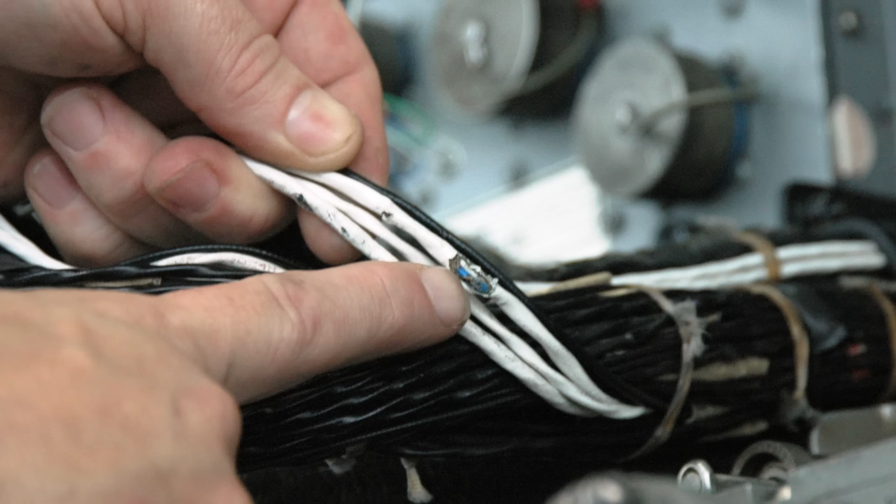A single steel bar locks the wheels down with a satisfying thunk. No computers, no circuits, just your arm and a piece of metal connecting you directly to the fate of the aircraft. Modern electric motors promise convenience, but every new wire and switch is one more hidden chance for failure when you least expect it. For pilots who have lived both worlds, the question is not nostalgia, it is survival.

The difference between trusting a bulb and feeling the gear engage could cost you more than just a repair bill. So why did aviation trade a human sense of certainty for automation's silent gamble? Let us break down what really keeps you safe in the air.

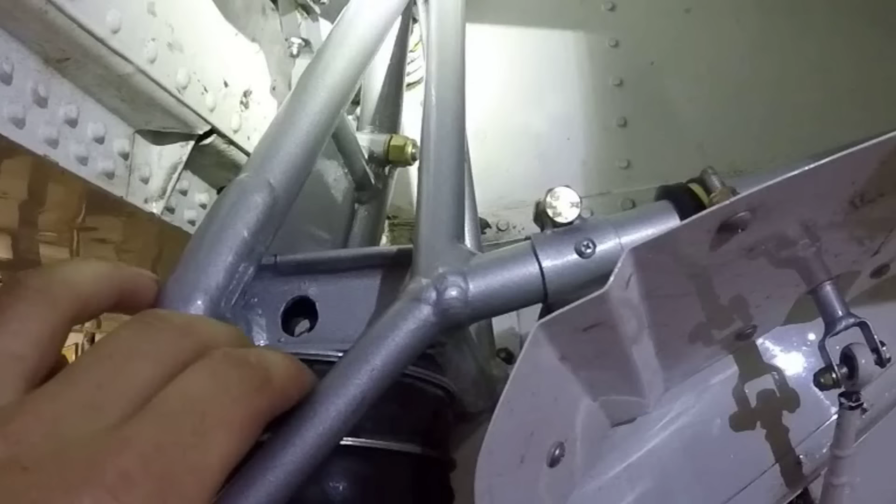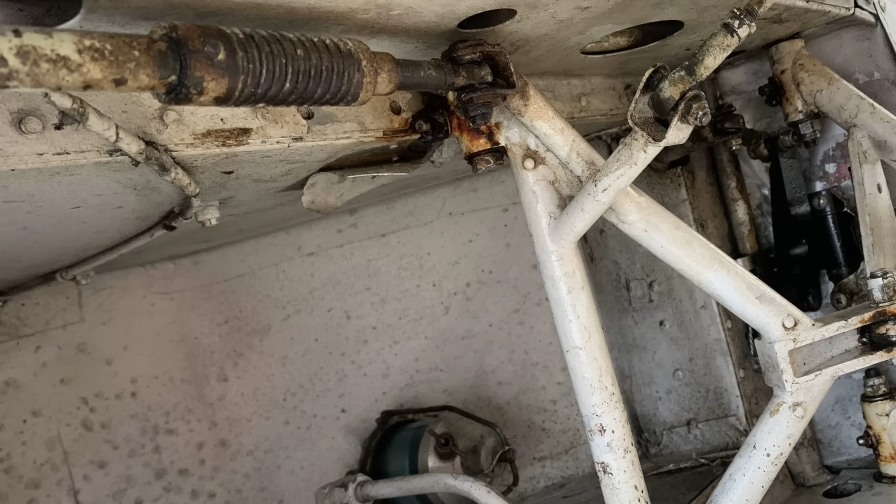Reach down between the seats of a classic Mooney and your hand closes around a steel lever, the Johnson bar. This is not just a handle, it is the first link in a chain that runs straight from your arm to the landing gear. The path is as direct as it gets, a solid bar anchored on a pivot under the floor, connected by push-pull tubes and bell cranks to the main gear legs. Every motion you make is transferred, unfiltered, all the way to the wheels. There is no motor humming in the belly, no relay waiting to click, just metal, moving metal.

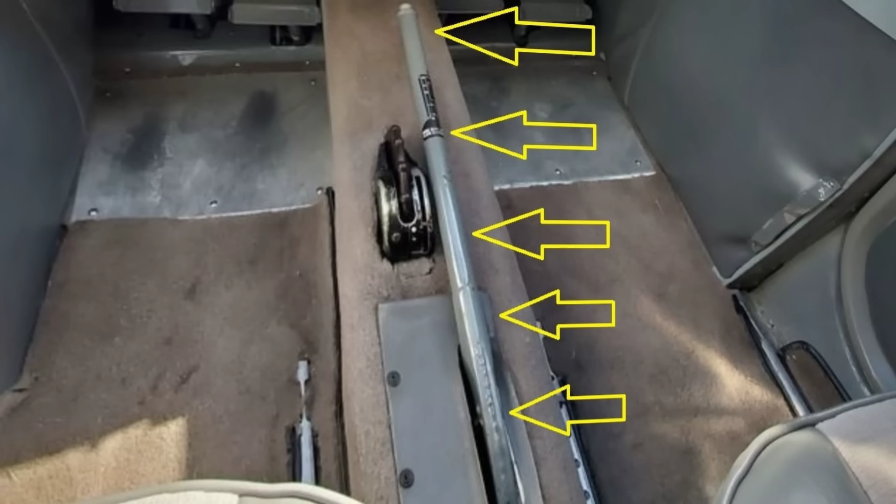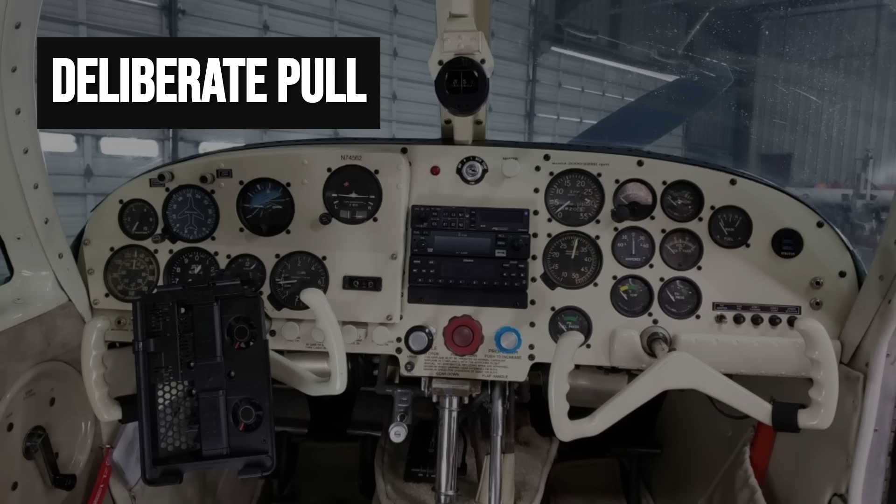The heart of the system is the over-center latch. When you throw the bar down for landing, you feel a rising resistance as the gear swings into place. Then, with a final snap, the bar locks over center and drops into a detent on the floor. That is not just a click, it is a mechanical promise. The geometry of the linkage means that once the bar is latched, the gear cannot fold back up without a deliberate pull. There is a downlock spring or bungee depending on the model, adding a final preload to keep everything tight.

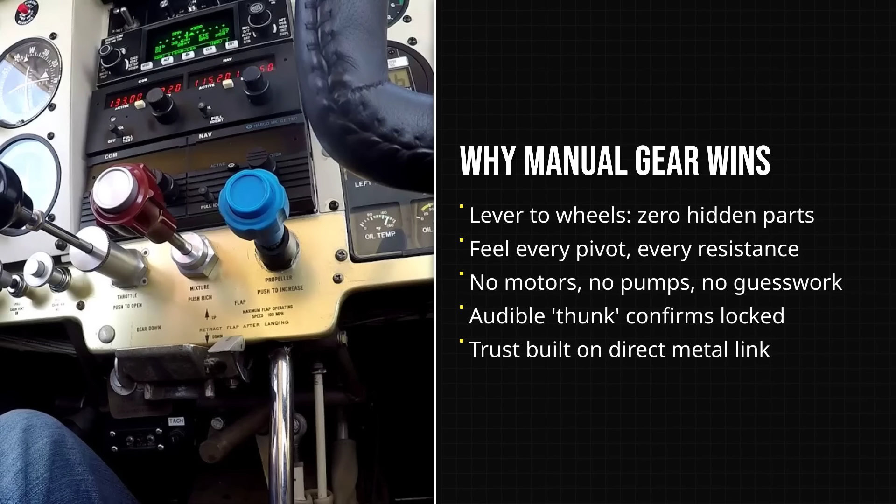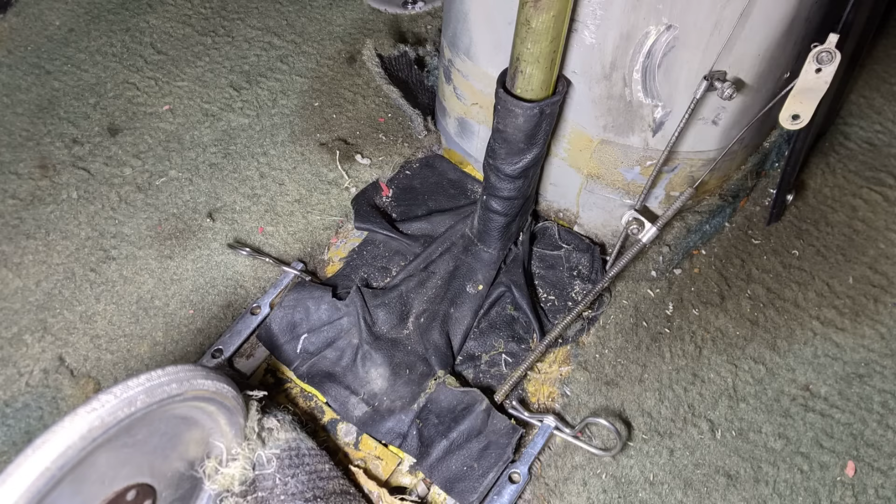From the cockpit, you can trace the entire system in your mind. Lever, pivot, tube, bell crank, trunnion. No hidden circuits, no buried actuators. If you ever wonder what is happening, you can look, reach, and touch each joint. The total part count is low, just enough to do the job, nothing extra to fail in silence. Every joint is visible, every movement is audible and tactile.

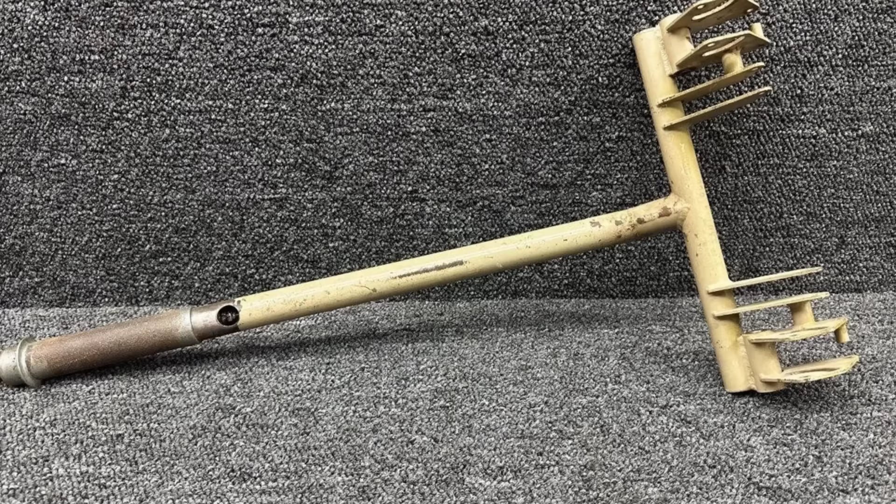When the bar is down and locked, you know it because you did it yourself. The floor vibrates with the thunk, the latch holds steady, and the gear is either down or it is not. No in between, no mystery. This is mechanical honesty. The Johnson bar does not ask for trust. It demands participation. The effort is not just a workout for your arm, it is a feedback loop.

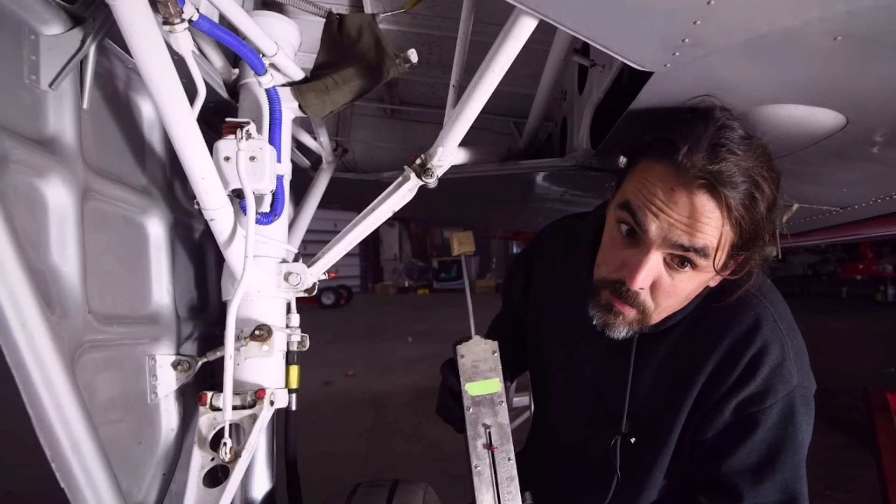If something is stiff, you feel it. If the bar will not go all the way, you know instantly that something is wrong. There is no guessing, no waiting for a green light. The entire linkage is a conversation between you and the airplane, and every flight, that conversation starts with a single, solid throw.

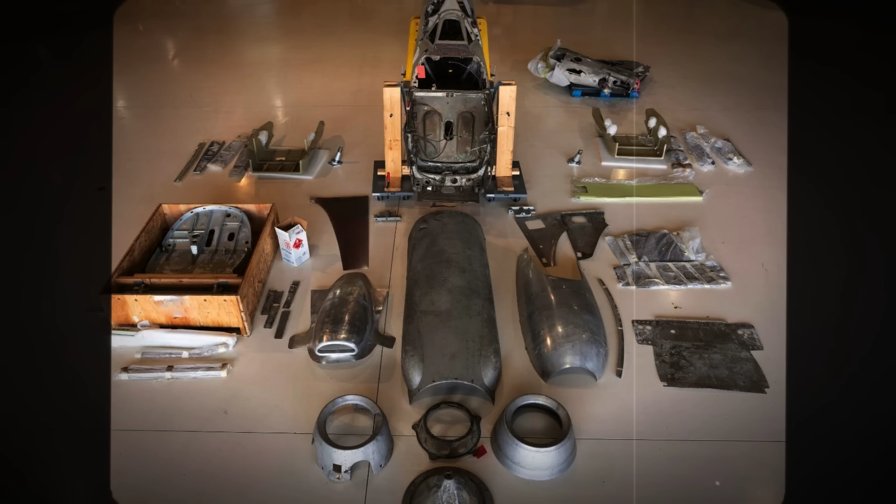Al Mooney didn't build airplanes for the faint of heart. He built them to go fast, run lean, and keep the pilot in command. In the 1950s, every ounce mattered. Hydraulic pumps and electric motors were heavy, complicated, and expensive to fix. So Mooney's answer was the Johnson bar, a direct mechanical link from cockpit to wheels that cut pounds and complexity out of the airplane.

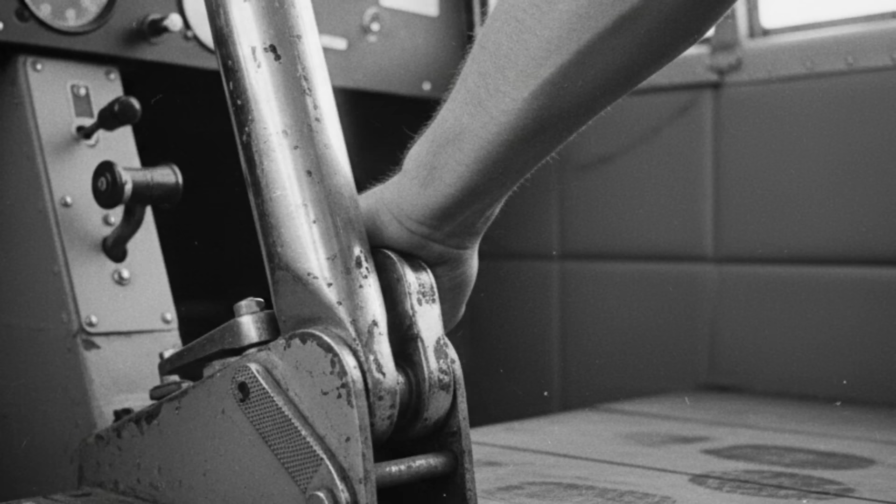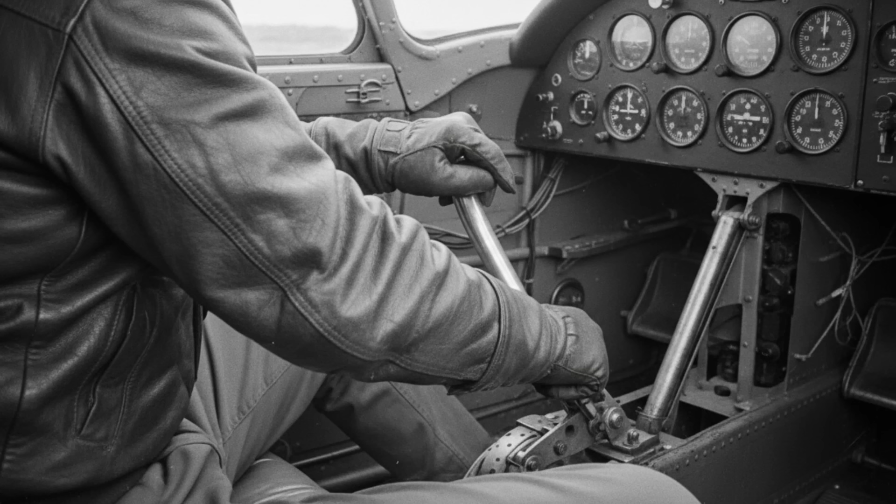The sales brochures of the day bragged about the weight savings. Less weight meant more speed, and more speed was the Mooney calling card. The manual gear wasn't just a throwback. It was a calculated decision to keep the airplane light and honest.

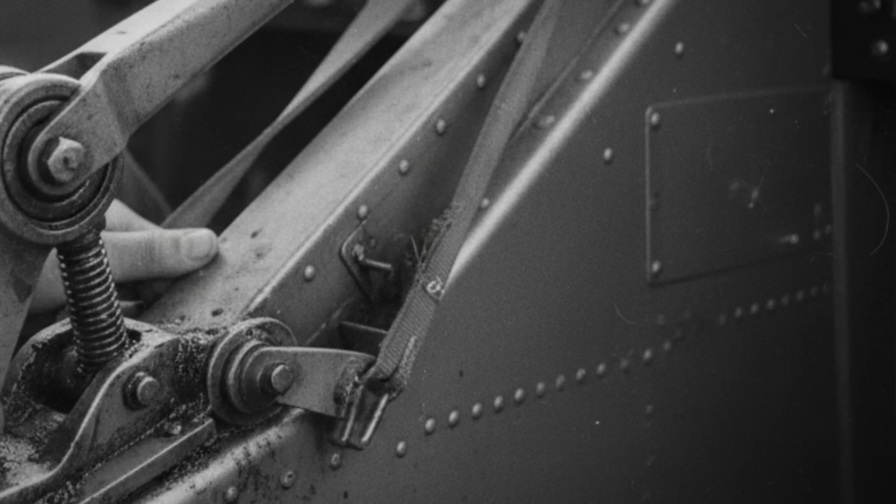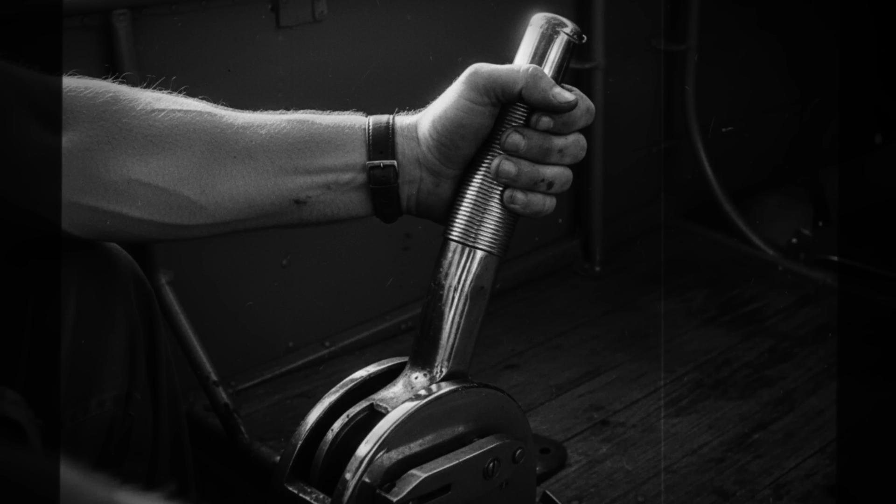Operating the Johnson bar is a learned skill. It is not just a matter of pulling a handle, it is a full body motion. You reach down, grip the steel, and drive it through a long arc. There is a moment where the load builds, and if you are above the gear extension speed, the aerodynamic forces fight you. That is the airplane's way of telling you to slow down. It is not a warning light or a buzzer, it is physics, right in your hand.

If you try to muscle the bar at 100 knots, you will feel the resistance and back off. Only when you are in the right envelope does the motion turn smooth and the bar snaps into its detent with a satisfying clunk. That is your confirmation, you did it right, and the gear agrees.

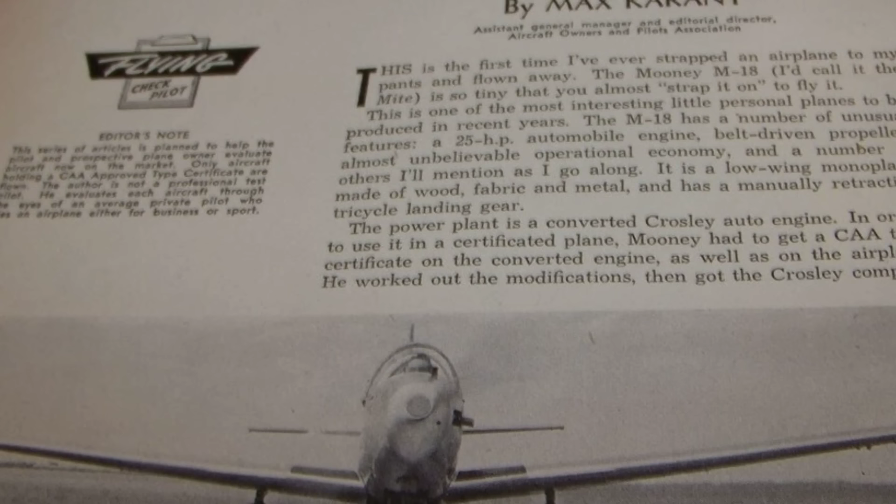Mooney's manuals and pilot training guides from the era spell it out. Proper technique is everything. The bar requires a quick, athletic throw, not a slow push. It is a move you practice until it becomes second nature. Some pilots call it a workout, others call it a ritual.

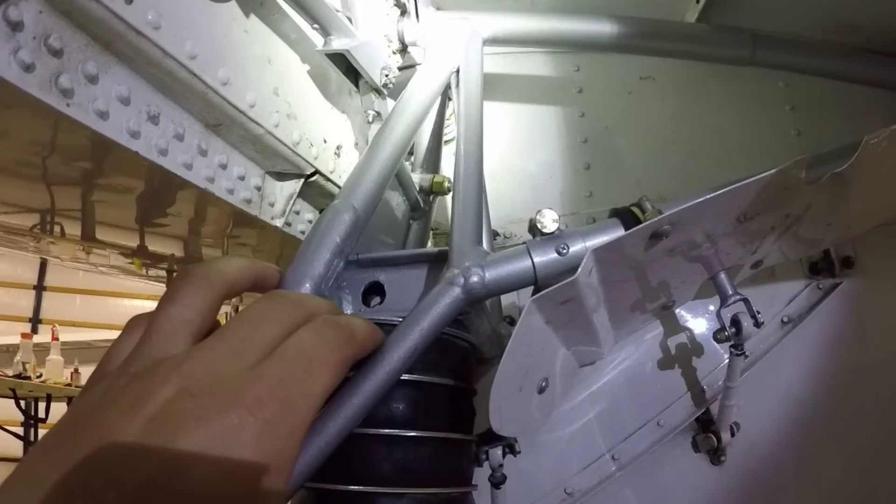Either way, it is a moment of connection. Your arm, the bar, the gear legs, all moving as one. There is no ambiguity. If something feels off, you know it instantly. If the bar won't go, you are either too fast, out of rig, or something is in the way. The feedback is immediate and unmistakable.

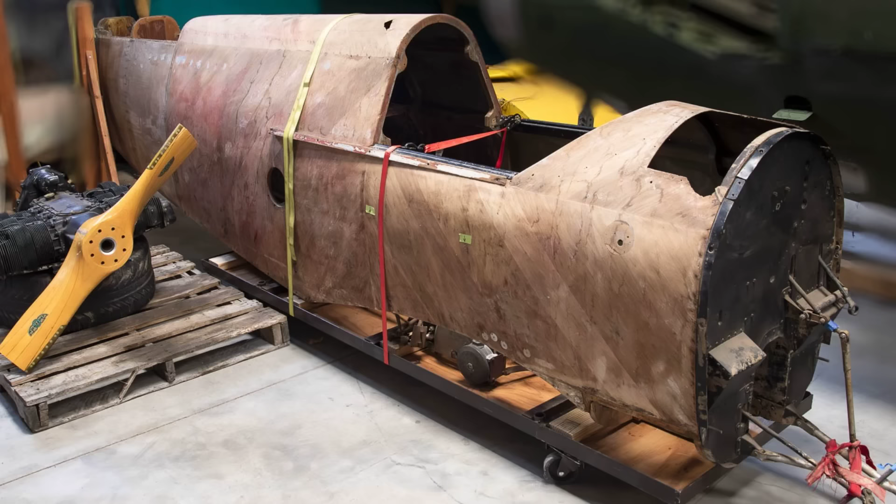This wasn't nostalgia or stubbornness. It was engineering for people who wanted to know exactly what their airplane was doing. The Johnson bar didn't just save weight, it put the pilot in the loop. Every movement, every ounce of force is a direct conversation with the machine. That is not something you get from a plastic toggle or a row of indicator lights. It is the kind of certainty that only comes from steel, sweat, and a design that trusts the pilot to do the job right.

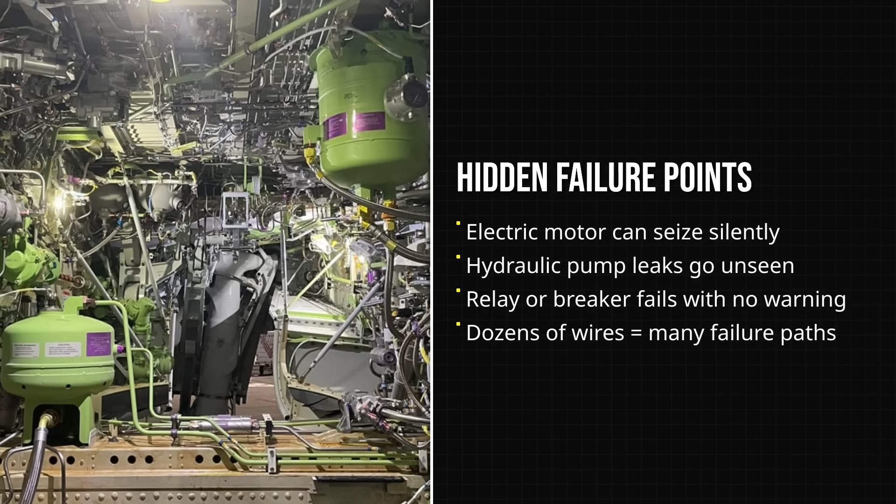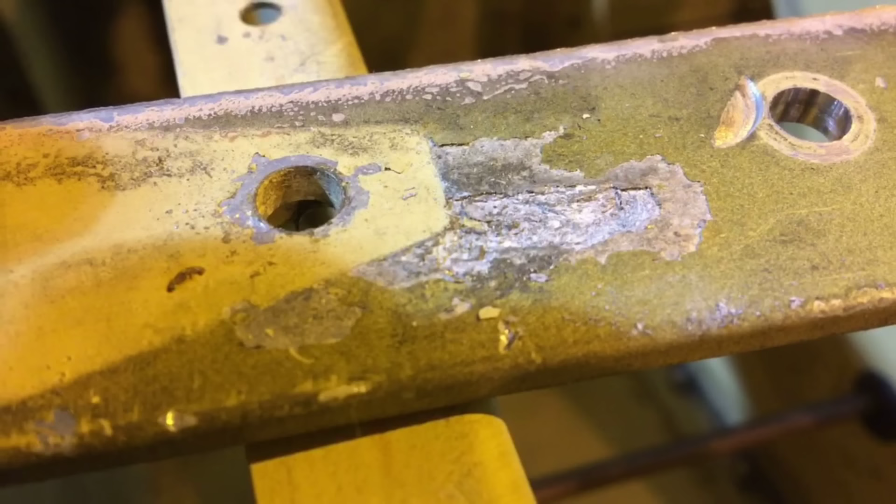Electric landing gear systems promise ease. You flip a switch, wait for the motor, and watch for a green light. But beneath that simple act lies a web of vulnerable parts, each one a potential point of failure. Inside the belly of a typical electric gear airplane, you will find an electric motor, a hydraulic power pack, a tangle of relays, circuit breakers, and a line of microswitches that decide when the gear stops moving. Each of those components has its own job and its own way of quitting, sometimes quietly, sometimes with a bang.

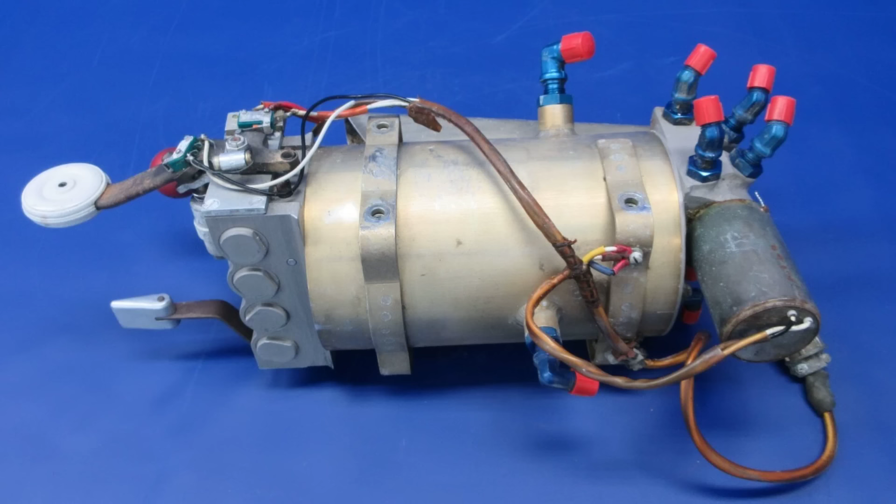Start with the power pack. In models like the Cessna 210 and Piper Arrow, the power pack is a compact bundle of electric motor, hydraulic pump, reservoir, and sometimes a pressure switch, all crammed into a single housing. If the motor seizes, nothing moves. If the pump leaks, you lose pressure and the gear hangs in limbo.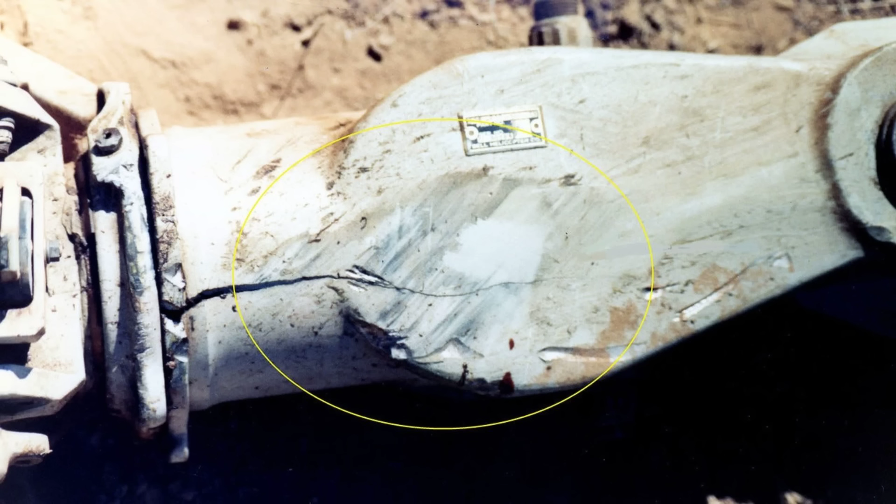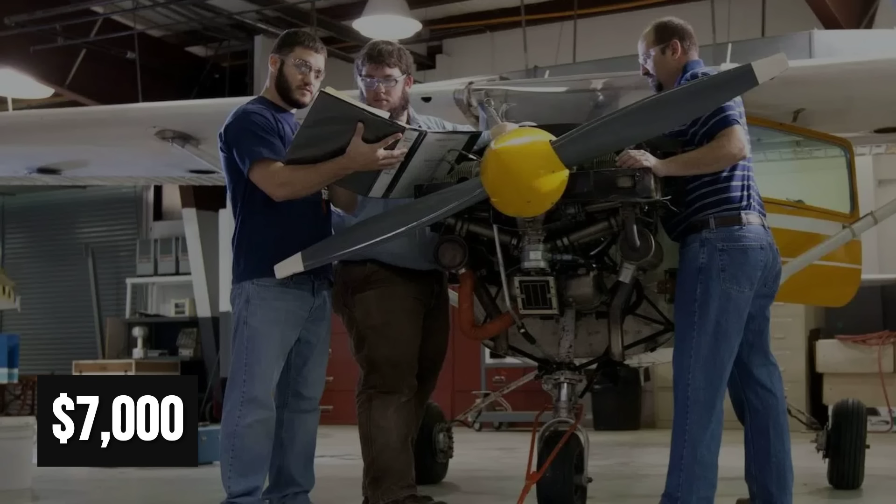FAA service difficulty reports and airworthiness directives keep showing up for these parts. Cracked reservoirs, worn brushes, leaking seals, and check valves that stick open are common. One failed O-ring and the fluid ends up in the bilge instead of the actuators. Shops routinely see overhaul invoices in the $3,000 to $7,000 range just for this one part.

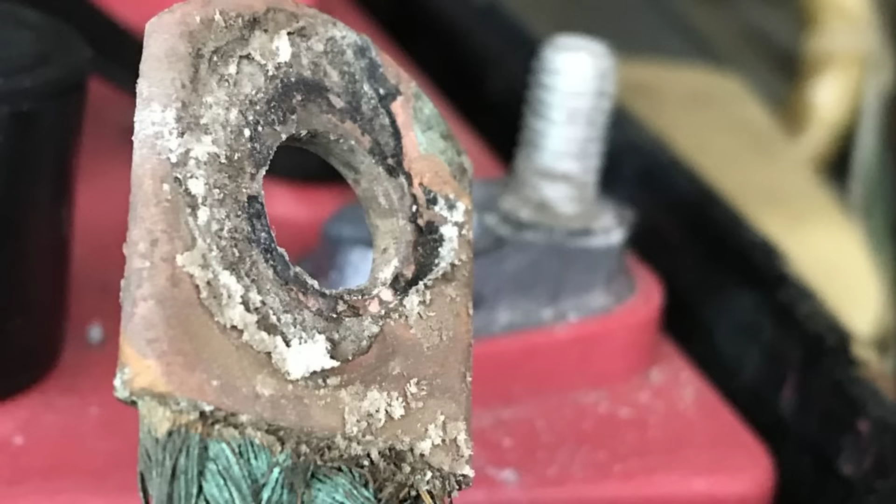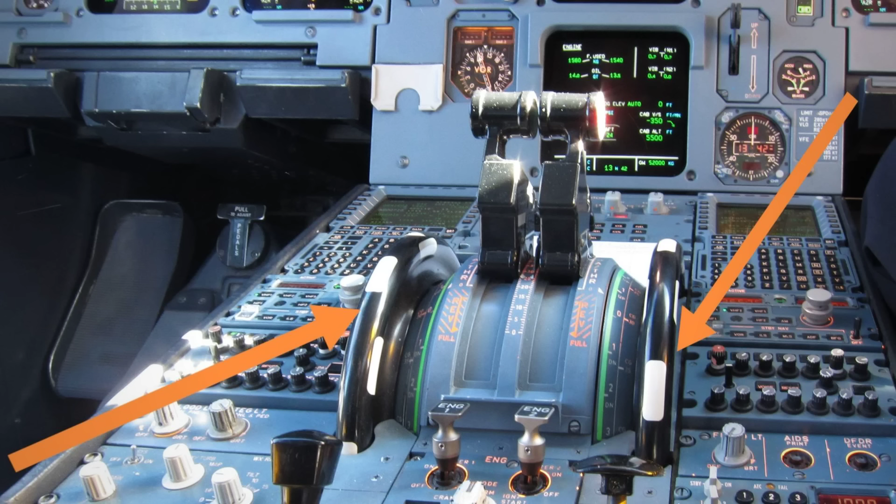The wiring is the next hidden risk. The wiring harness snakes through the fuselage, connecting to relays that route power and to breakers that protect against shorts. Any corroded connector, chafed wire, or loose ground can break the chain. Circuit breakers trip for reasons that are not always obvious, sometimes from a real fault, sometimes just from age and vibration. When that happens in flight, the pilot faces a silent panel and a gear handle that does nothing.

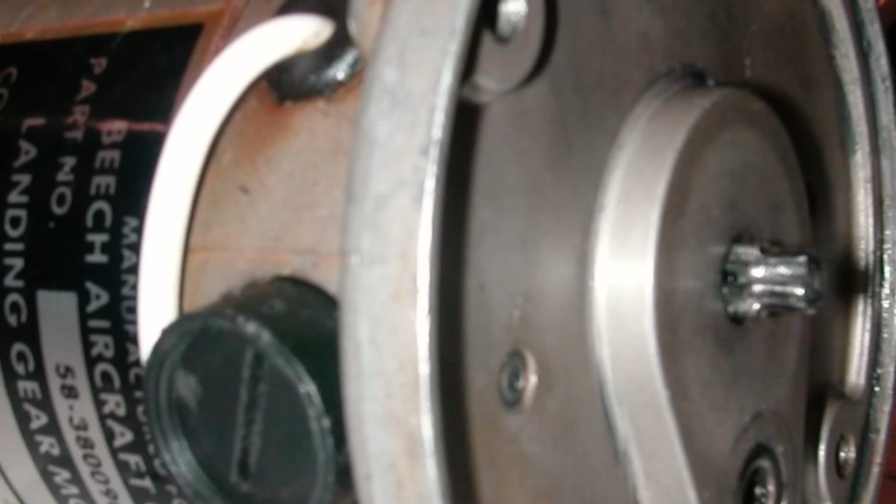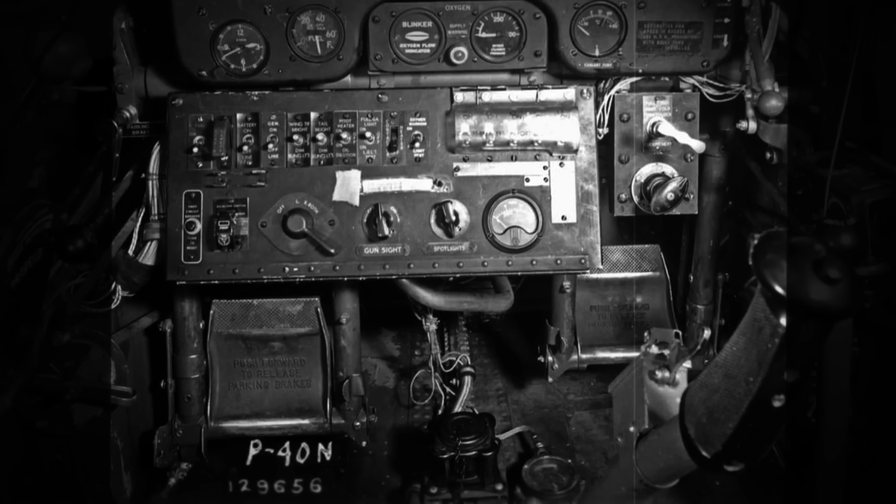Micro switches and limit switches are how the system knows when to stop. If a switch drifts out of adjustment, the gear might stop halfway. If it fails closed, the motor can keep running until something strips or a breaker pops. It is not rare to find a gear leg hanging after landing, all because a switch sent the wrong signal. Piper and Cessna both issued service bulletins and airworthiness directives about these switches, which can be misadjusted, worn, or simply dead after decades of use.

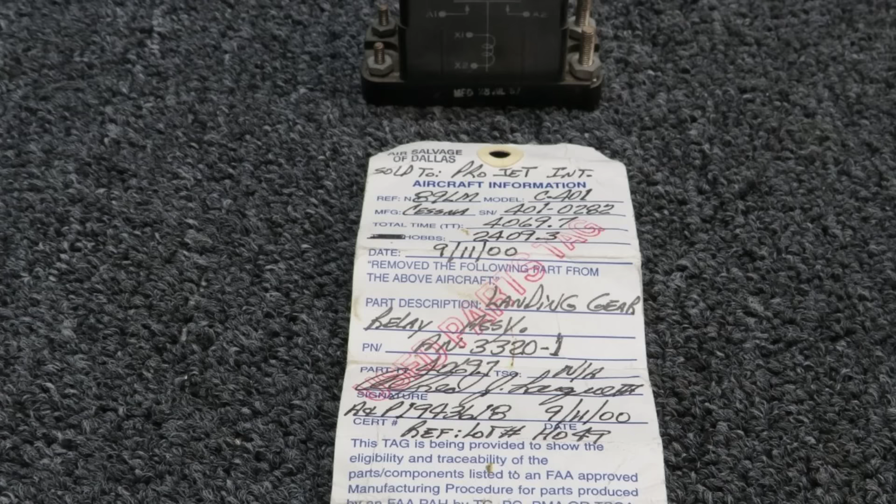Relays are another hidden weak link. These small boxes take the pilot command and send current to the motor. A sticky relay can leave the gear stuck in transit, or worse, trigger an uncommanded movement. In some models, a single failed relay means the gear will not move, period.

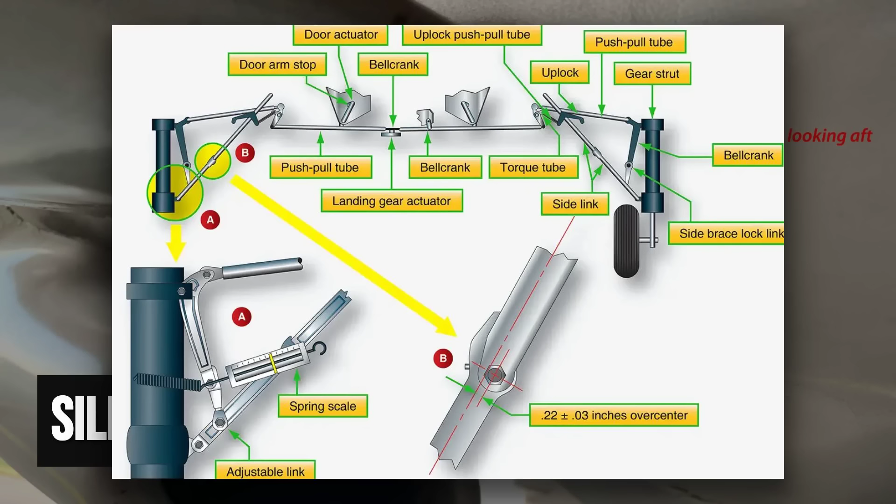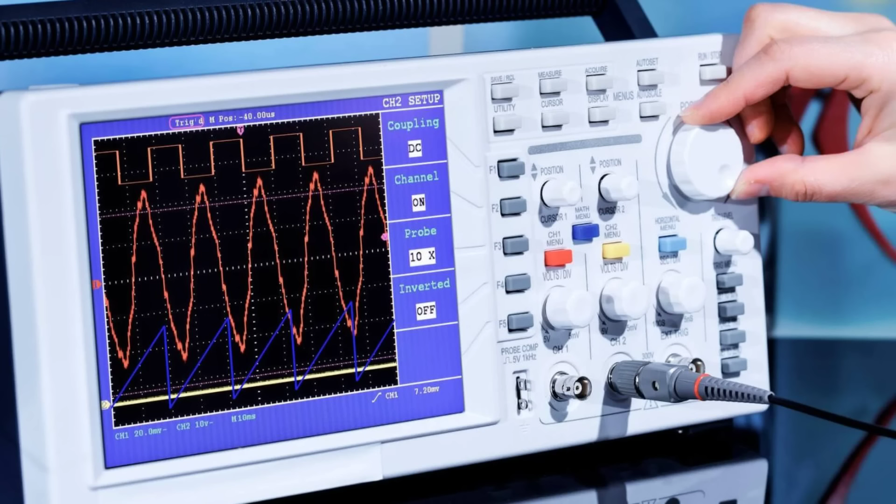Add to that the mechanical side: actuators, uplocks, downlocks, and pivot points. Electric motors can mask a stiff or binding joint until the system stalls or something breaks. By the time a pilot realizes there is a problem, the gear might be jammed halfway, the breaker popped, and the checklist out. Diagnosing which part failed often means guessing at invisible electrons and hidden mechanisms while still flying the airplane.

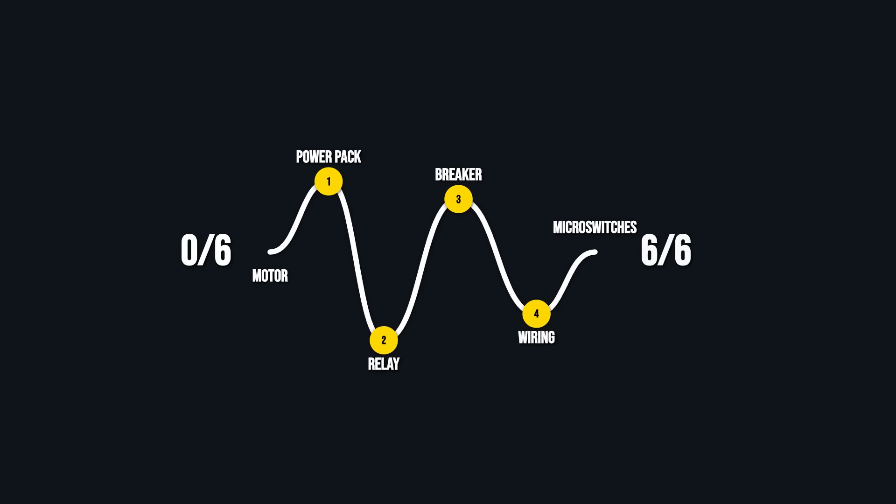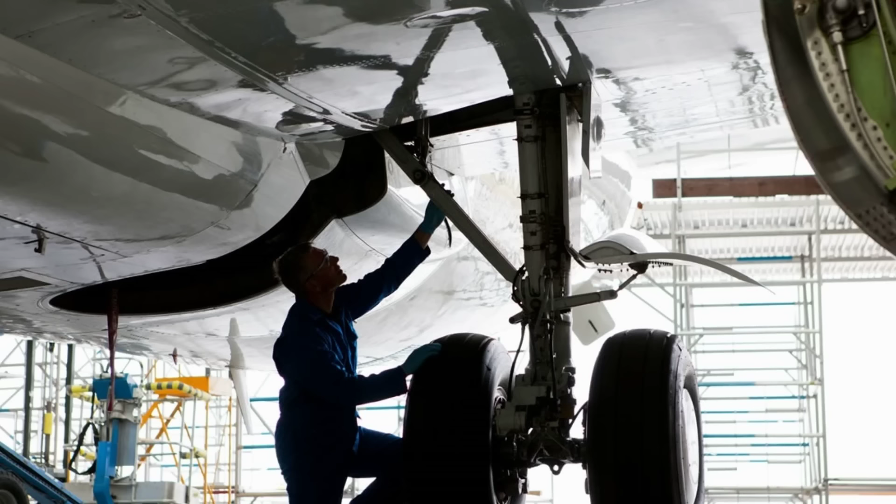Every one of these components, motor, pump, relay, breaker, switch, wire, has its own service life, its own quirks, and its own price tag. The more parts in the chain, the more ways for the chain to snap. In a Johnson bar system, you can see and touch every joint. With electric gear, most of the risk is hidden until something stops working. That is the cost of complexity, convenience up front, and a long list of maybes lurking under the floorboards.

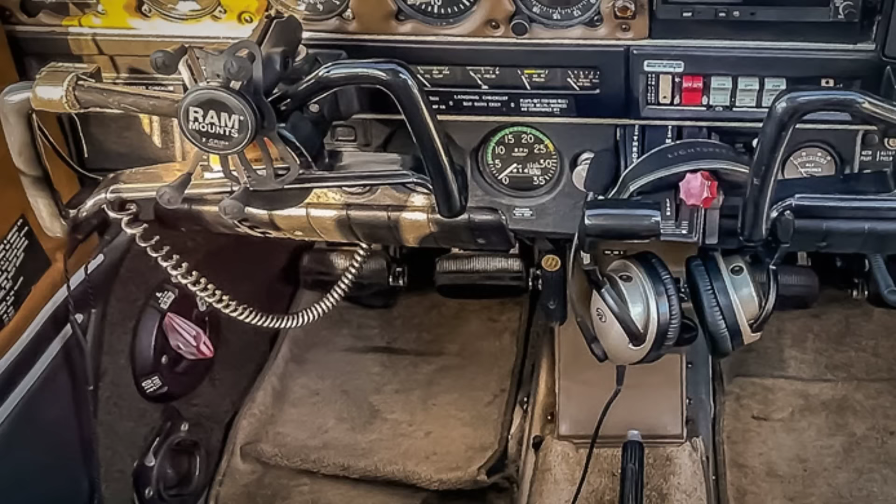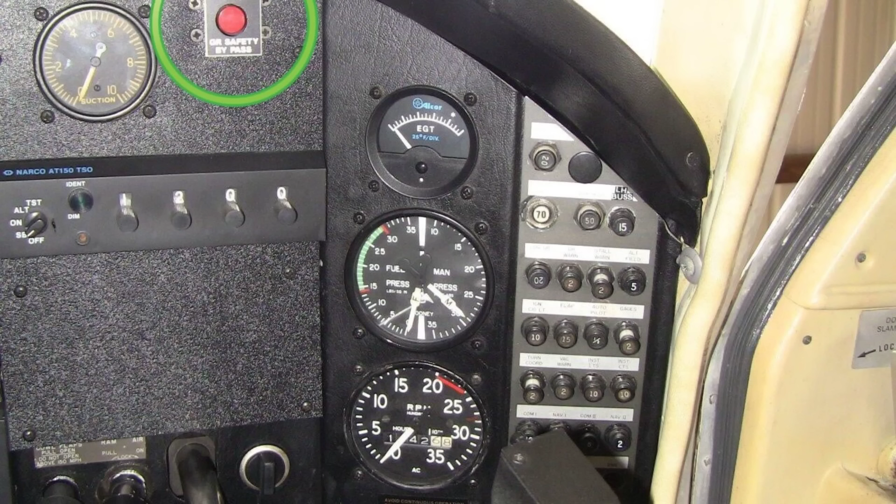Picture yourself low on final approach, engine coughing, runway rushing up. You reach for the gear. In a Johnson bar Mooney, that is a single, deliberate swing, 1 second, maybe 2 seconds, and the wheels are locked. The bar drops into its detent with a jolt you feel in your bones. That is it. No waiting, no hoping. The entire cycle is as quick as your right arm and as certain as the laws of physics. Certainty.

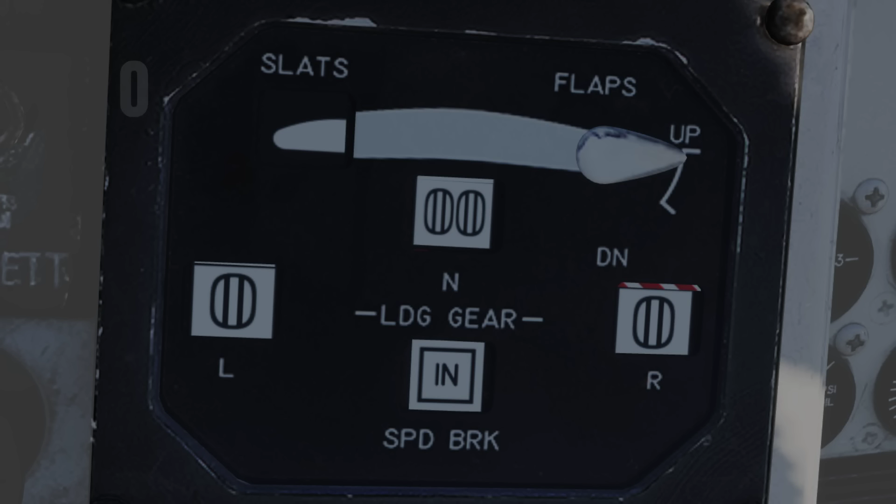Now take the same scenario in an electric gear airplane. You flip the switch and wait. The motor spools up, the hydraulic pump whirs, and you count off the seconds. 1, 2, 3. By the time you reach 10, you are still watching for 3 green. That is normal. Most pilots' operating handbooks for single-engine airplanes with electric gear list extension times in the 8 to 12 second range, sometimes longer if the system is tired or cold.

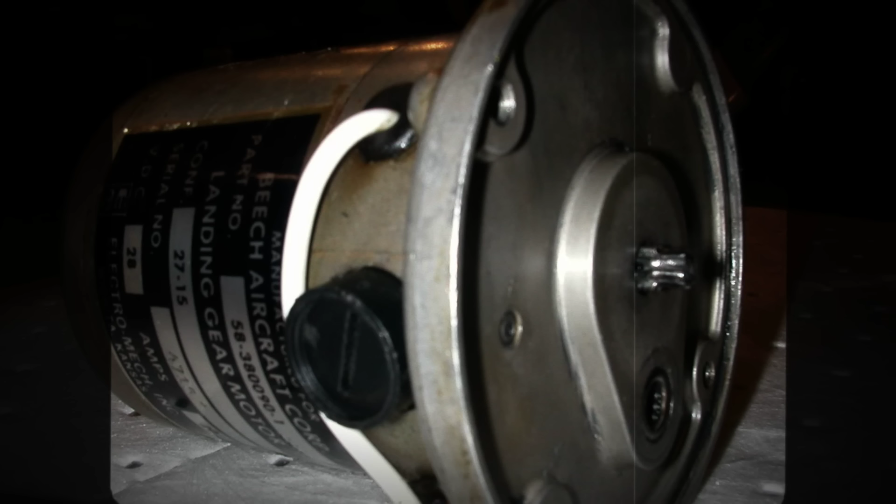If the motor is slow or the pump is sticky, you might be staring at the panel, heart pounding, as the runway gets closer and the gear is not down yet. If the electric system fails, things get slow and complicated in a hurry. Emergency extension is not a single motion.

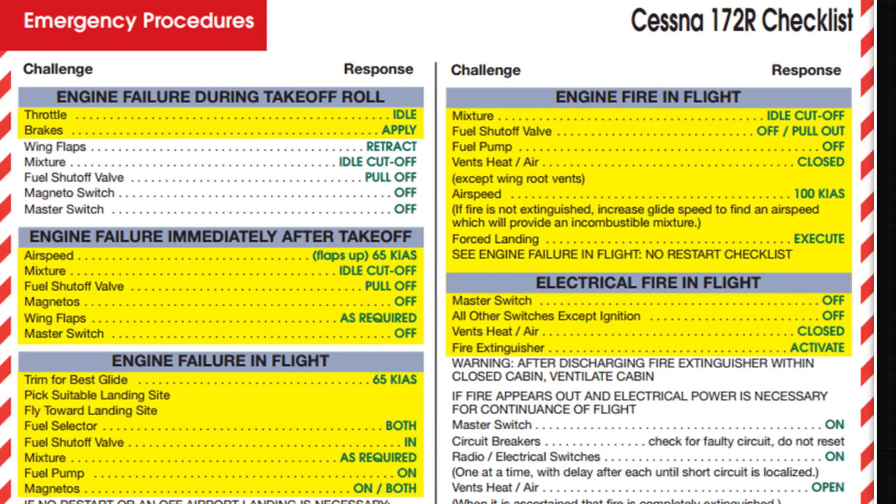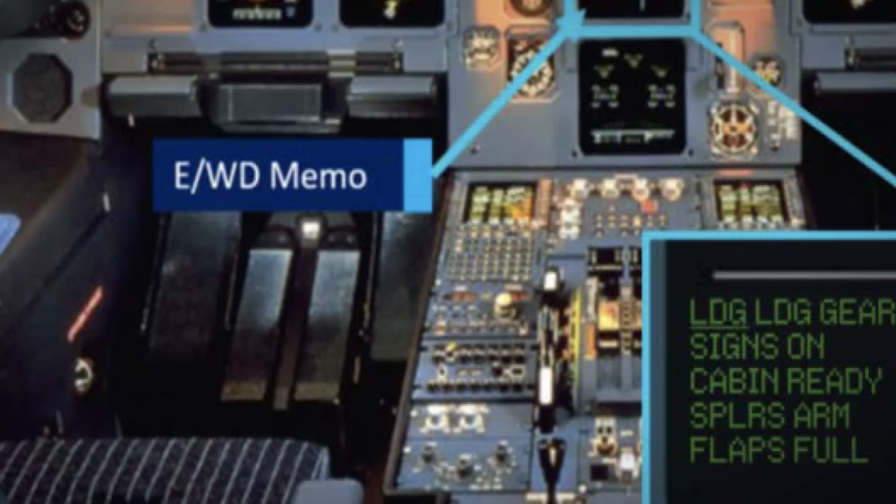It is a checklist: find the handle, remove a panel, crank dozens of turns, or pump a lever. In real-world training, emergency extension often takes 20, 30, even 40 seconds, and that is with a pilot who has practiced. Add in the panic of an engine out or smoke in the cockpit, and those seconds stretch into eternity. Every move eats into your margin.

At a descent of 500 feet per minute, you lose more than 8 feet of altitude for every second spent fumbling with the gear. There is no stopwatch in the cockpit, but the numbers are real. A Johnson bar thrown at the right speed is as fast as your reflexes, over and done before the adrenaline even hits. Electric gear is a waiting game, and if the system quits, you are suddenly in a race against gravity and your own memory of the emergency checklist. In the time it takes to run the manual crank, you could have cycled the Johnson bar a dozen times.

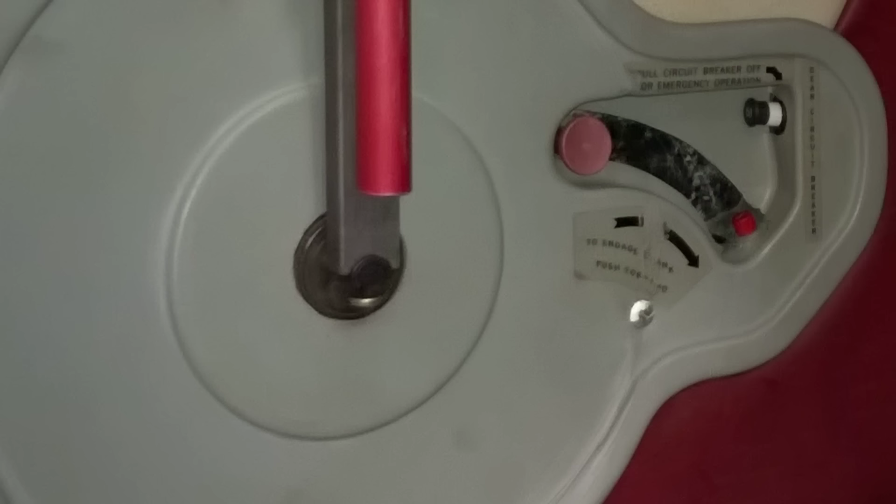This is not just theory. Ferry pilots and instructors know that in time-critical emergencies, engine out, fire, forced landing, the difference between a 1-second throw and a 10-second wait can decide whether you make the field or end up short. The Johnson bar does not give you more skill or luck, but it hands you back those precious seconds when everything else is going wrong. When the only thing between you and the ground is what you can do right now, speed is not a luxury. It is survival, and that is why, in the worst moments, the old manual bar still earns its keep.

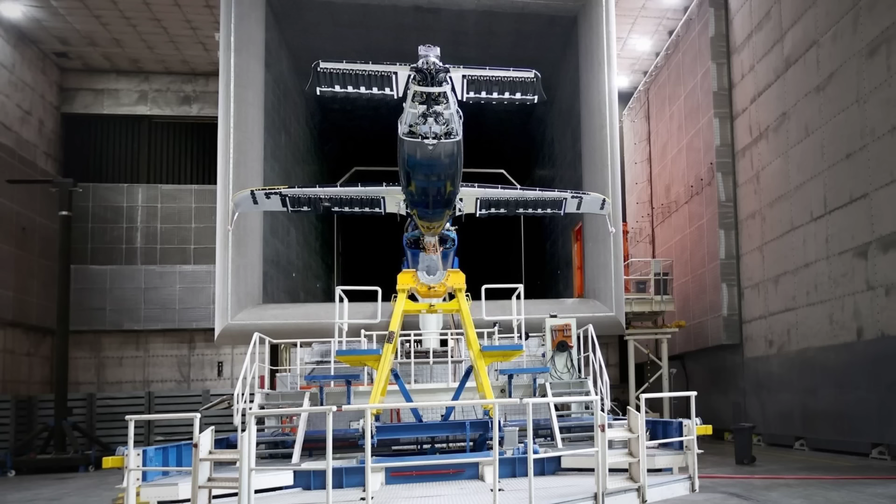You can't fake what the Johnson bar tells you. Every ounce of force in your right arm is part of a feedback loop that no electric switch can match. When you reach for that lever, you're not just flipping a command, you're reading the airplane's mind through your own muscles. The resistance isn't theoretical, it's real, and it changes with every knot of airspeed and every bit of drag on the gear doors. If you're too fast, the bar pushes back, warning you in a language you can't ignore. There is no guessing, no waiting for a green light to flicker on.

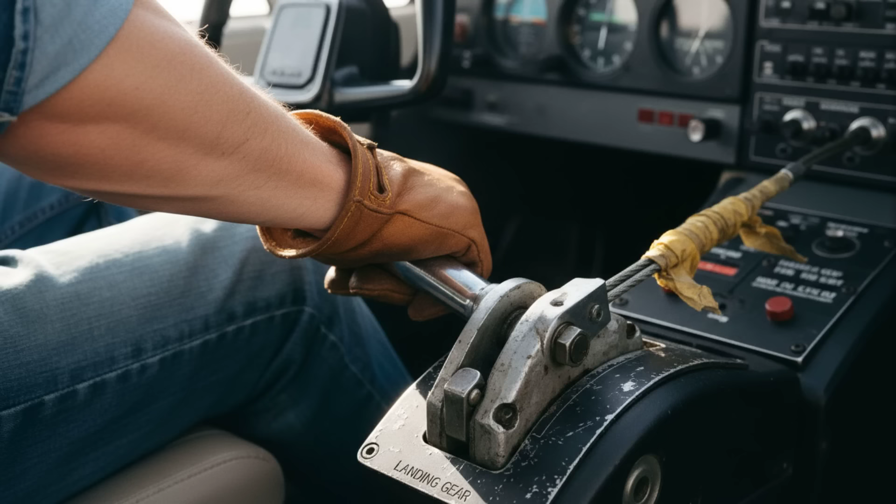Your body picks up a change in force as small as 5 or 10%. That's all it takes for you to notice something's off, maybe a little extra stiffness, maybe a sudden stop halfway through the throw. You feel it before you see it. That's the edge. If there's mud or ice in the wells, the bar hits a wall, not a breaker. You know immediately whether it's just high airspeed or a jammed leg. You can back off, try again, or decide to land with the gear up if you have to. The answer is in your hand, not buried in a checklist or hidden behind a panel.

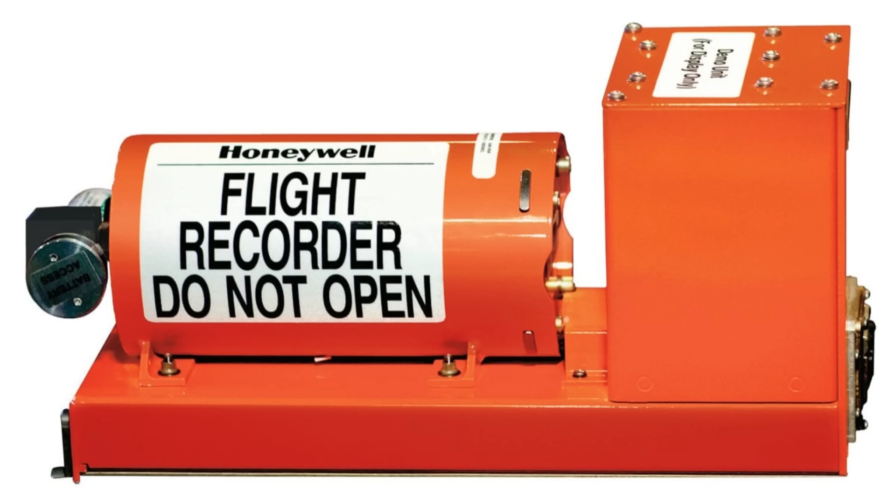That's why pilots who fly these airplanes trust the bar. It's a direct sensory channel: your arm, the bar, the gear. No black box, no mystery, just you and the machine working it out in real time. Every flight, you get a mechanical conversation that electric systems can't deliver. And when something is wrong, you are the first to know, not the last.

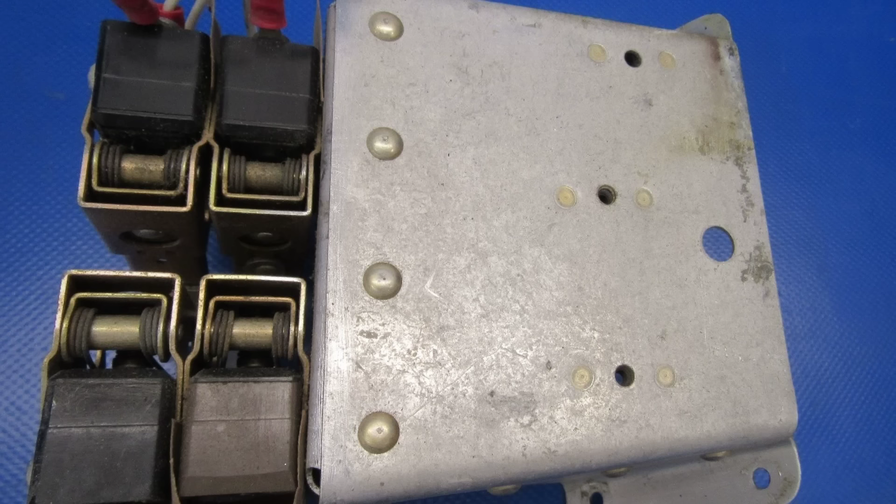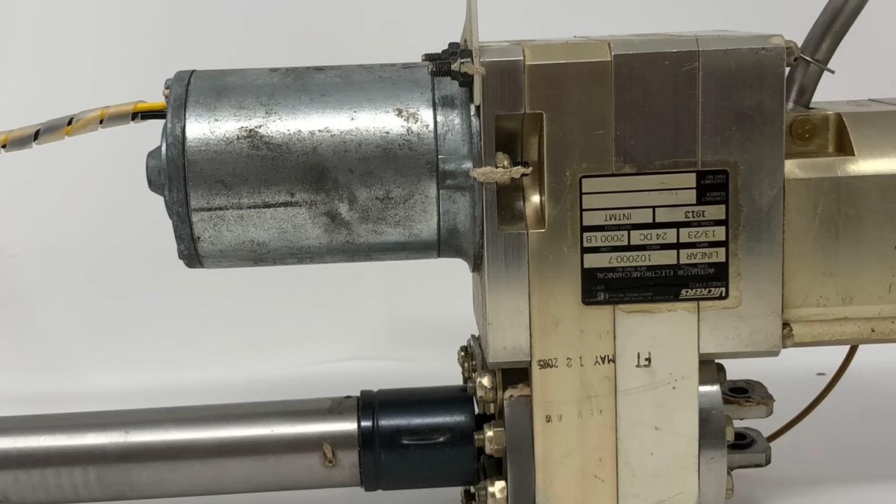Open a mechanic's invoice for a 1970s Mooney with electric gear, and you will see the story in black and white. Power pack overhaul, $4,200. Add in a couple of relays, a limit switch, maybe a few hours of troubleshooting a dead green light. Suddenly, the bill creeps towards $7,000. That is not every year, but it only takes one surprise to wipe out the savings from a decade of routine annuals. Electric gear is a gamble. Most years it is just checks and lubrication, but when it fails, it fails big.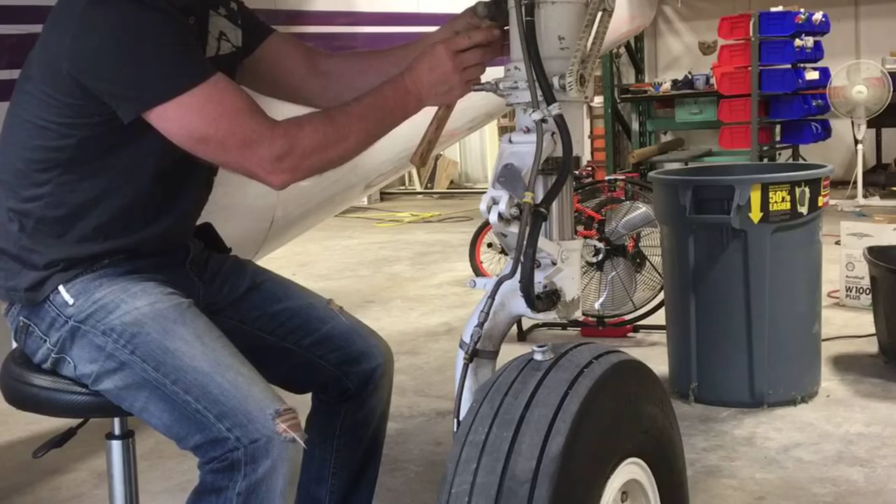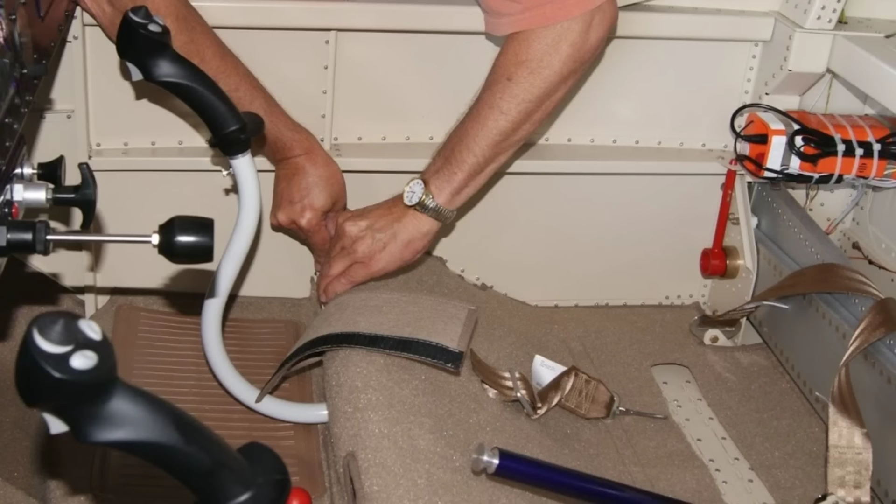Manual gear Mooneys tell a different tale. The typical repair ticket is a few hundred dollars for new pucks, a bungee, or a round of grease. Maybe $1,000 or $2,000 if you do it all at once. No power pack, no hydraulic lines, no hunt for a decades-old actuator. The parts are simple, the labor is straightforward, and the work can be planned into the annual inspection. That predictability means owners know what is coming. There is no mystery bill lurking under the floorboards.

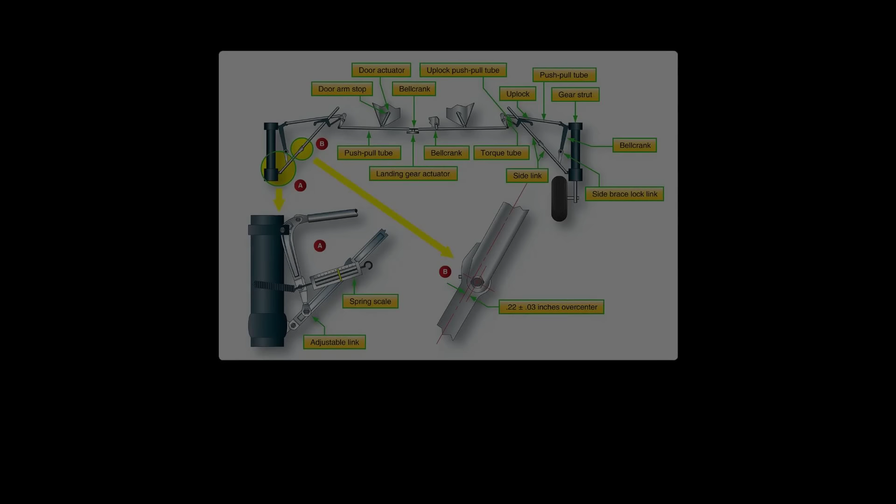That predictability has started to shape the used market. There is a steady set of buyers who look past the shiny panels and ask one question: does it have the Johnson bar? They are not chasing nostalgia, they are dodging $5,000 surprises. For them, a manual gear Mooney is not just an airplane, it is a hedge against the unknown. The numbers do not lie. Fewer failure points mean fewer chances for your wallet to take a hit.

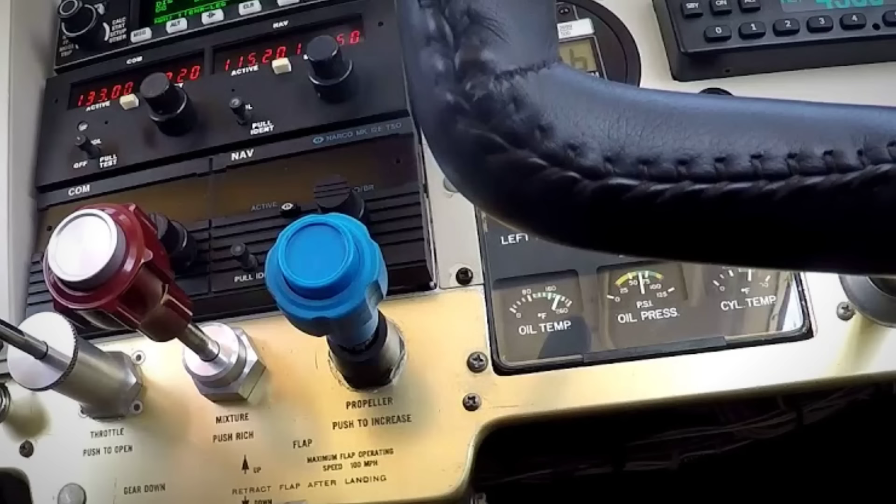In an era where automation quietly multiplies hidden failure points, mechanical feedback is rare and valuable. Today's pilots still face emergencies where seconds and certainty matter. For all our advances, the simplest solution can offer the surest control. In the cockpit and beyond, sometimes the safest choice is still the one you feel in your own hands.